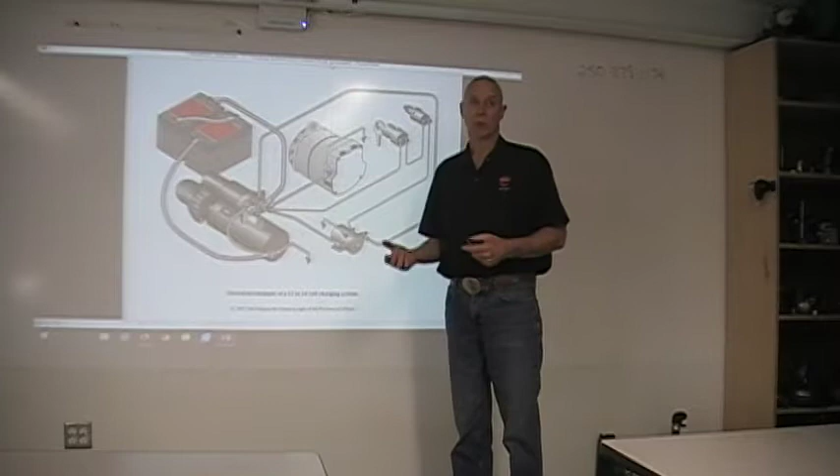So when we're doing voltage drops, we also have to do the voltage drop on the ground side. Now the rest of the circuit is our starting circuit, which we're going to be discussing at a later date.

Now again, one of the things we have to make sure of is that we're using the right battery for the application of the machine we're looking at. If the battery capacity is too small, that means the alternator is going to run continuously to keep charging that vehicle. Again, the first thing we want to check is the battery.

Is the battery working properly? And how we do that is we load test it.

Now, when we're taking a look at the alternator and how they're set up, the newer ones that use a serpentine belt also use a belt tensioner. And making sure that the belt tensioner is working properly.

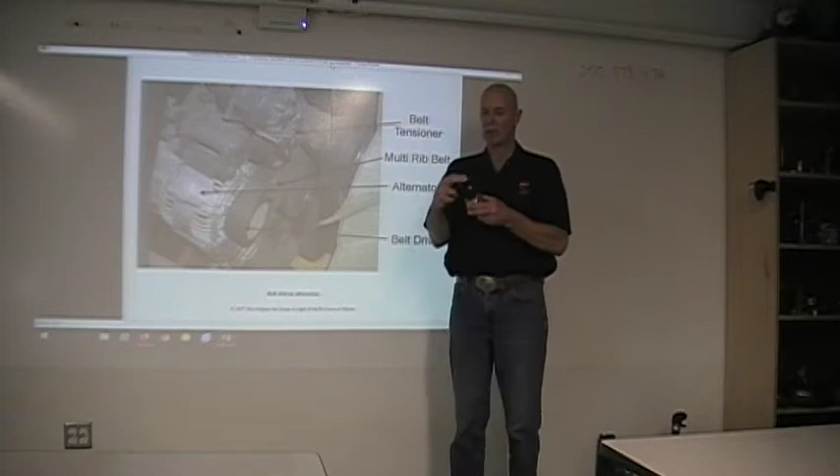So here we have a belt tensioner, and all it is, is a pulley that runs on a bearing. Now this has a spring inside that keeps a proper amount of tension on that belt at all times.

Some of the problems we run into is, oh, I can't get exactly the same length of belt. So if I get a belt that's too long or too short, we're going to end up with problems, because as an alternator starts to charge, it creates a magnetic field. That magnetic field will slow down an engine.

So if the belt is too long, the alternator could slip. If the belt is too short, it could put too much load on the front bearing of the alternator, and we could end up with a bearing failure.

So it's really important to make sure that when we are installing a new belt, the belt is exactly the right length for that application.

When we're taking a look at the components of an alternator, one of the things we have is regulators. They're internal regulators built inside the alternator.

Now this on a Leece-Neville, this internal voltage regulator, we can take it out. When we get into the Delco Remy, we can't. They are an integral part. We have to really take the whole alternator apart to get at the voltage regulator.

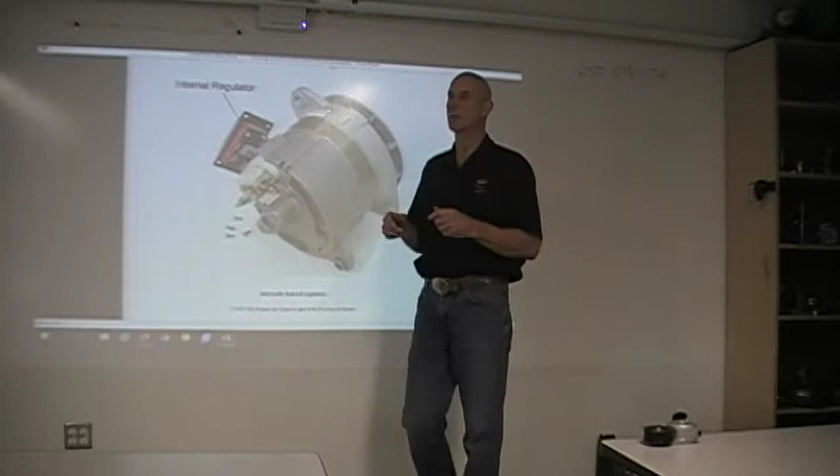On the older vehicles, they used to have an external voltage regulator that was mounted on the firewall. Now, before they came out with electronic voltage regulators, they used to use 3 separate coils inside this box to control the field.

Now when we look at alternators and how the circuits are set up, we're going to take a look at the alternator as 2 separate circuits and understanding how each of these circuits work to charge a battery.

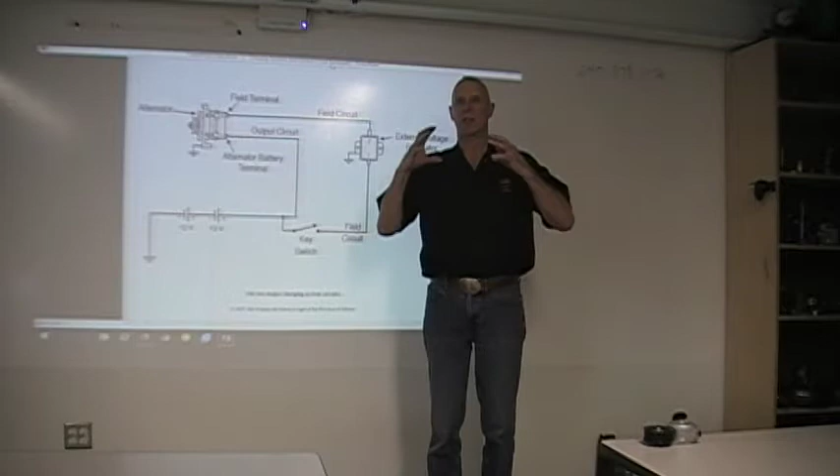So what we have here is, off of our battery we have our key switch. Once we close our key switch, it sends power to our external voltage regulator, and from there it goes to the F terminal on the alternator. The F terminal is the field terminal, and that is what's going to build the magnetic field internally inside the alternator.

Now if you remember back from when we were discussing basic electrical, if we take a wire or a conductor and move it through a magnetic field, we're going to induce voltage. Now when we move it back out the other way, it's going to induce voltage in the opposite direction. And this is called AC voltage.

And this is what happens when we have an alternator. It produces AC voltage. Now AC voltage for us doesn't do any good. We have to convert that AC voltage into DC voltage to be able to charge a battery. With AC, it pushes and then it'll pull. So we have what's called an AC sine wave when an alternator is producing current.

So again, what we have on an alternator compared to a generator: in an alternator we have our magnetic field in the center, and that is the rotor. Off of our battery, we go into 2 slip rings and 2 brushes. So as power is fed into the rotor, it builds a huge magnetic field.

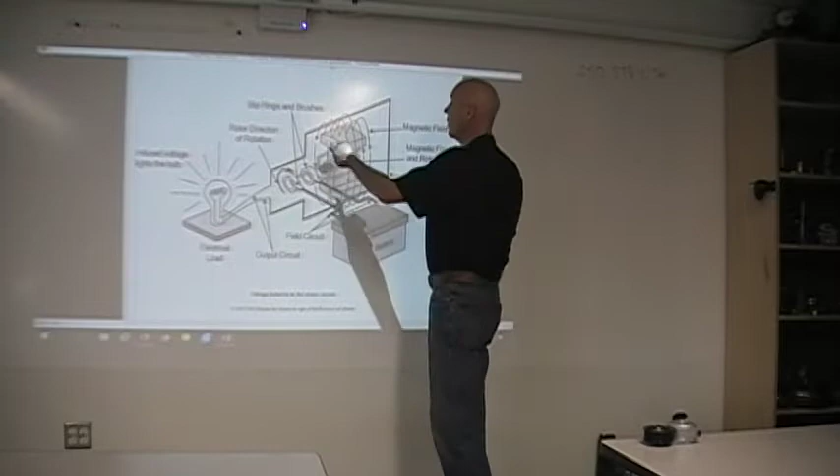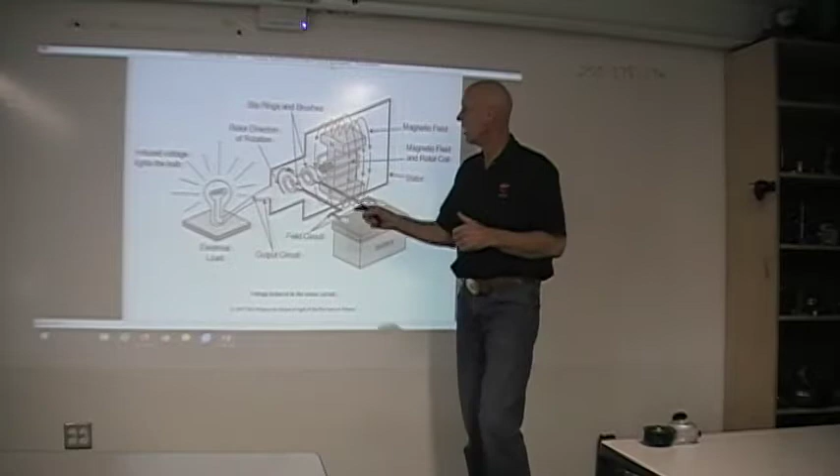Now this magnetic field, if you remember from basic electrical, has flux lines that run from the north to the south pole. As this rotor is spinning and those flux lines cross a conductor, it induces voltage within that conductor. Anytime it's in line with that conductor, it's inducing voltage as it's moving through there. Same with the south pole. So we have current flowing in one direction, it'll light up a light bulb.

Now as we go 90 degrees to that conductor, no voltage is induced and the light bulb will go out. But then when we get back down to the other side, voltage is going to be induced in the opposite direction.

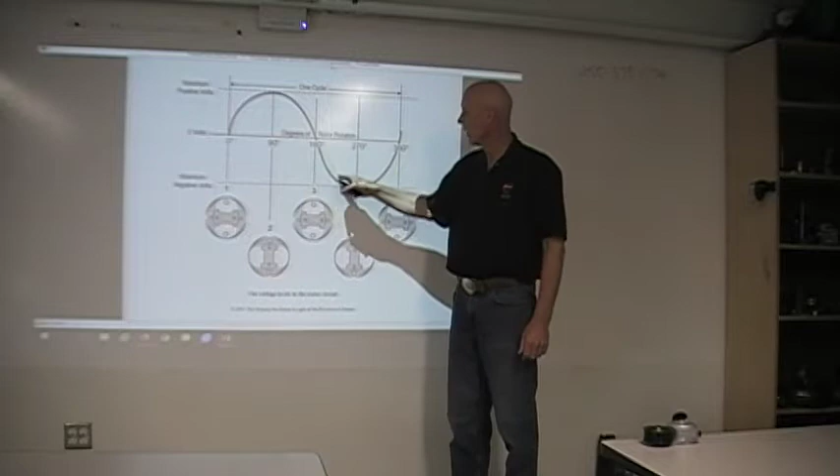We start at 0 degrees where it's not in line with the conductor. As it gets close to the conductor, it induces the maximum amount of voltage. As it comes out of alignment, we get back to 0 volts. When it starts to rotate in the other half, we have voltage in the opposite direction, and then it goes back up to 0 when it's not in line with the conductor.

Again, this is AC voltage, which doesn't do us any good. So what we want to be able to do is change that AC voltage into a DC voltage so that we can use it to charge our battery.

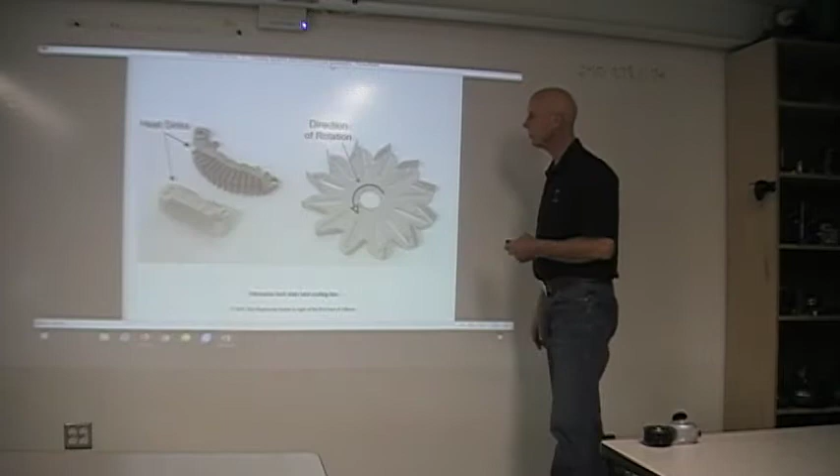Some of the things we see inside an alternator, and it's important to understand how these work: we have a heat sink. In the back of the alternator we have rectifier diodes, what's called a rectifier bridge. There's 3 negative and 3 positive diodes.

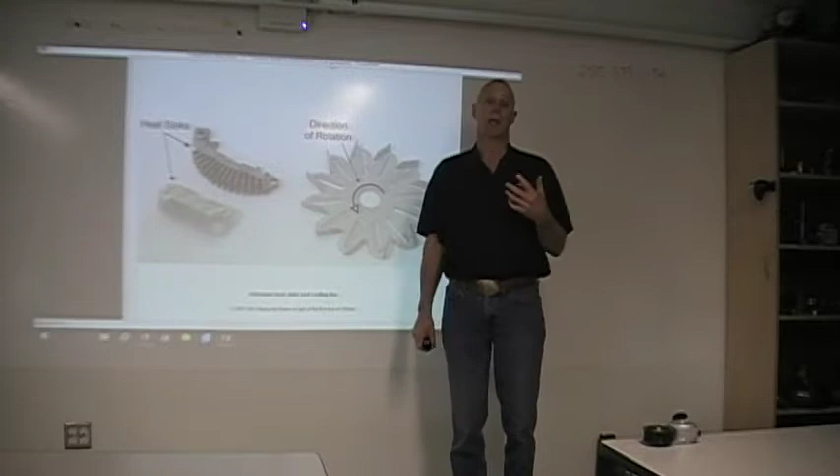Every time one of these diodes switches, it generates a little bit of heat, so we have to put these diodes into a heat sink to get rid of that heat or the diode's going to burn up. The other thing we have is a fan on the front of the alternator. The fan pulls air through the back and out the front, because we want the coolest air to cool those diodes. That's what we're after, taking that heat away so they don't burn up.

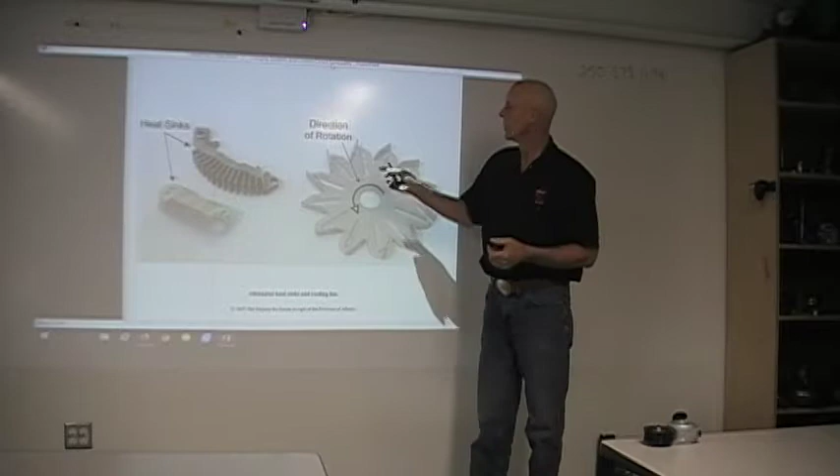Now this fan is a directional fan. You can get different types of fans, and it does matter which rotation it is, but if we put the wrong fan in, we'll be bringing air from the front through to the back.

One of the common failures is a truck that's leaking a little bit of oil. That oil collects with dirt and plugs up the back of the alternator. If we don't have airflow through the back to cool those heat sinks, we're going to overheat the diodes and have an alternator failure. So it's one of the visual checks we can do as we're looking for problems.

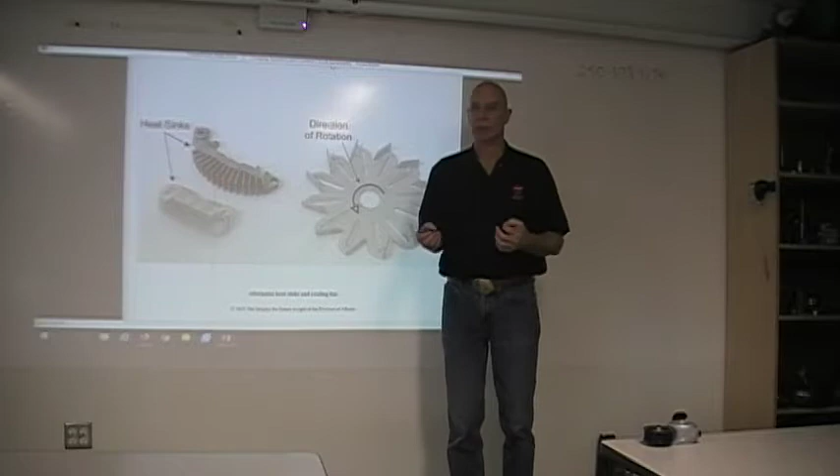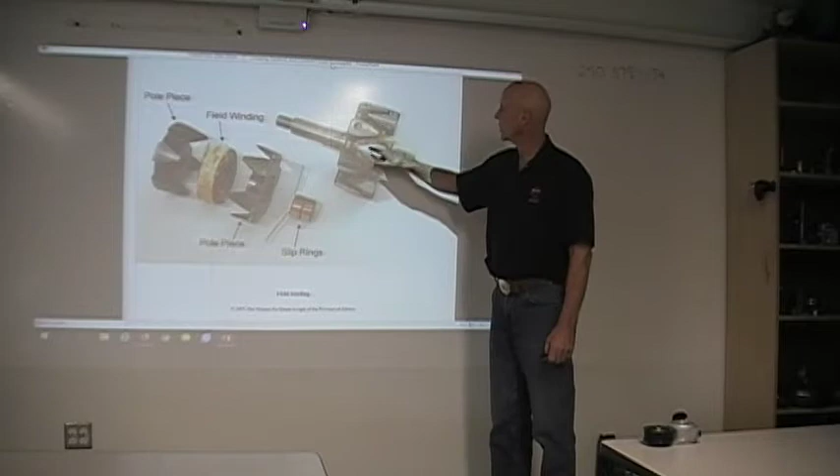Now the other thing we have inside is the rotor, this is the component that builds the huge magnetic field we need for inducing voltage into the stator. All it is, is a coil of wire with 2 pole pieces. So we'll have a north, a south, a north, a south, all the way around. Also on there we have our 2 slip rings, because we have to be able to feed power or current through that rotor to induce that magnetic field. Otherwise, if no magnetic field, no charging.

So when they're all put together, this is what we have if we take a look at the rotor.

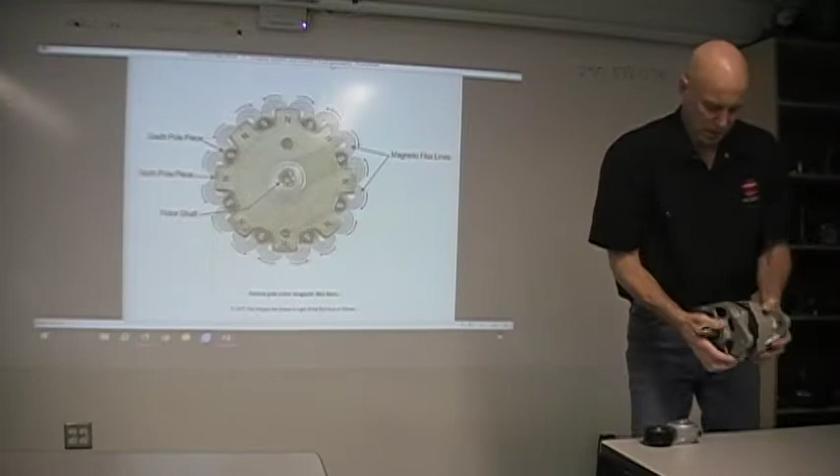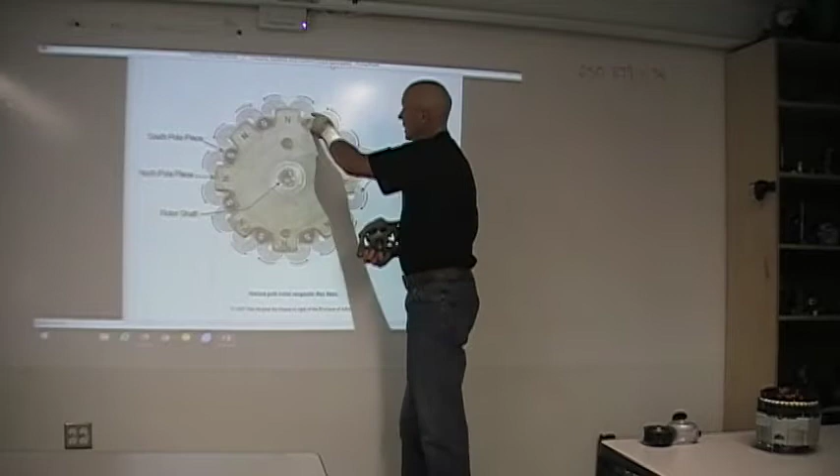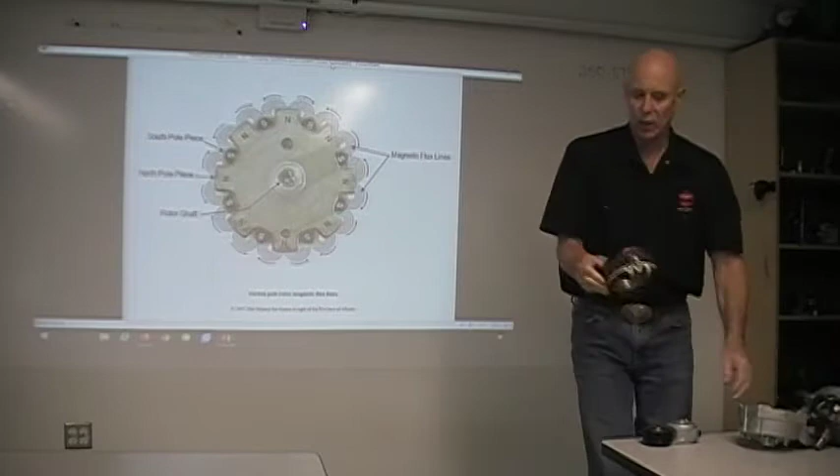So this is our setup. This is what our rotor looks like. We'll have a north pole, south pole, north pole, south pole. As this rotor is spinning, we have flux lines that come off that go from north to south. As these flux lines cross a conductor, it'll induce voltage in that conductor. So if we have our stator with all these windings, as these flux lines cross a conductor in the center here, it's going to induce voltage in that conductor and send it out through these three leads.

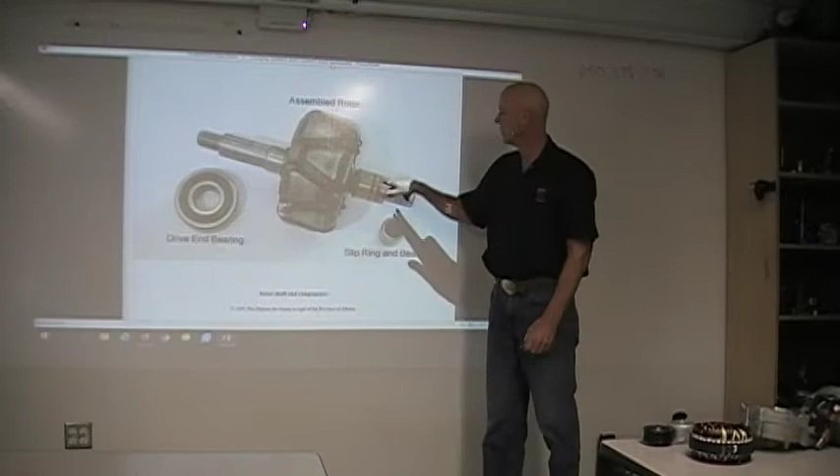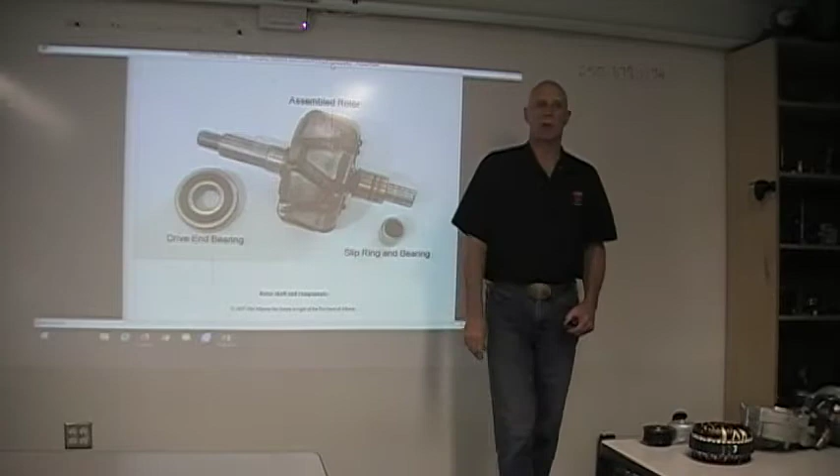Again, we have our slip rings, and our two brushes are going to fit on the slip rings. We have a back bearing and a front bearing. The front bearing is bigger and carries the most amount of load. It's really important that if we're adjusting belts, if we have V-belts, we don't adjust them too tight, or we're going to put extra load on that bearing.

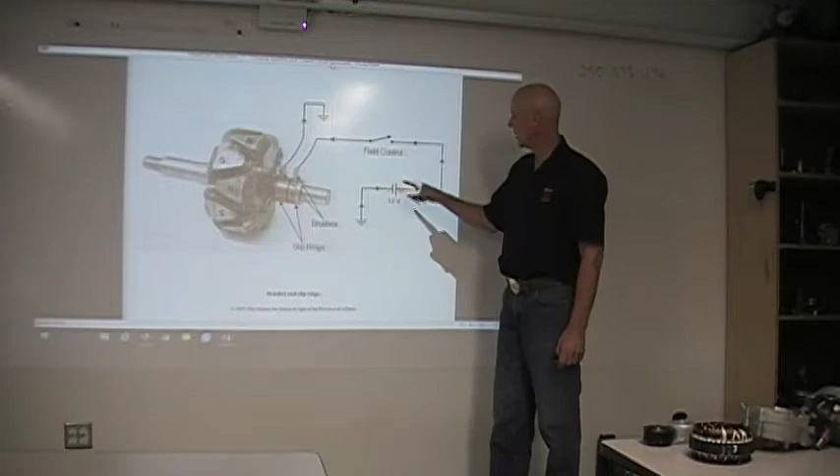So this is how our field circuit's set up. Off of our ground from our battery, it goes through our field circuit. If our field circuit is open, no current can flow through the rotor and it can't produce a magnetic field, and again, it's not going to charge. As soon as we close the contact here, current is going to go through our slip rings, through our rotor, out the other slip ring, and back to ground to complete our circuit, and we're going to build a magnetic field. Now, we have to be able to control how big our magnetic field is going to be, and we'll do that with a voltage regulator, which we'll discuss a little bit later.

Now, these are two different types of alternators. This is probably the one we see most common. It runs on a V-belt, or it could be a serpentine belt. The other type of coupling is a direct drive, which could be bolted directly to the engine, so there will be no slippage in this one at all.

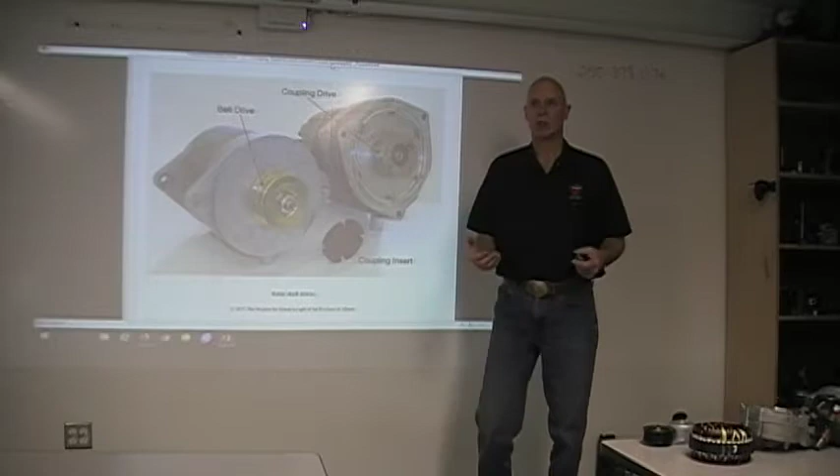Now we take a look at our stator. This is a three-phase stator, which means we have three separate sets of windings. They're laminated and have a resin coating on them so they don't contact each other, otherwise we'll end up with a short. Remember, the three faults we have in the circuit are opens, grounds, and shorts. If this gets too hot, the coating or varnish is going to bake off and start to fall apart, and then we'll have wire-to-wire contact, and we'll end up with a problem with our alternator.

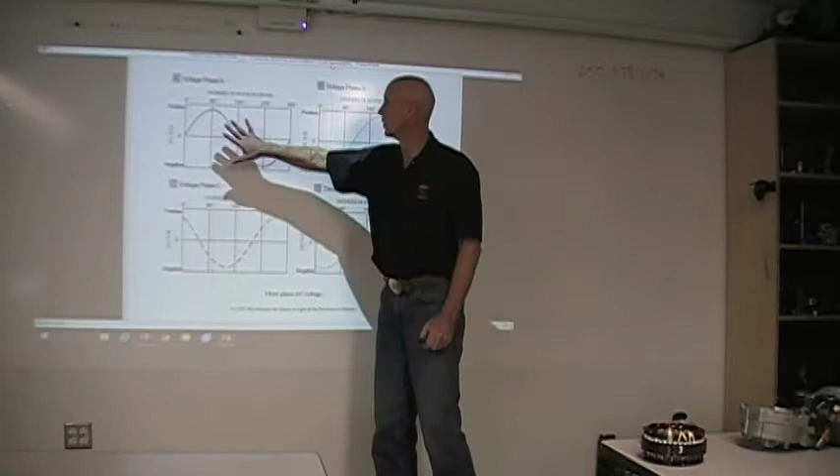Now when we take a look at the phases, if we take a look at what we were looking at earlier with a single wire, that's single phase, but we have three phases. A single phase would look like this. When we get into three-phase, we have three separate phases that induce voltage, or current, into that stator winding. If they could color code them, we need as many wires as possible. The more wires we have in each of the phases, the more voltage that is induced in that winding as the rotor spins and those flux lines cross that wire or conductor. It's going to induce more voltage.

So there are two different types of windings we're going to see. We'll see a Y-type stator, and we have to take this apart to identify it. We'll see three separate ring terminals with a single wire on each, and then another set where all three wires are wrapped together, and that's the center point. There are certain applications where we might want a Y-type alternator, or a delta style. If you take a look at this one, we have three ring terminals, but two wires on each. This is a delta style. If you separate them, you can see the two wires on each.

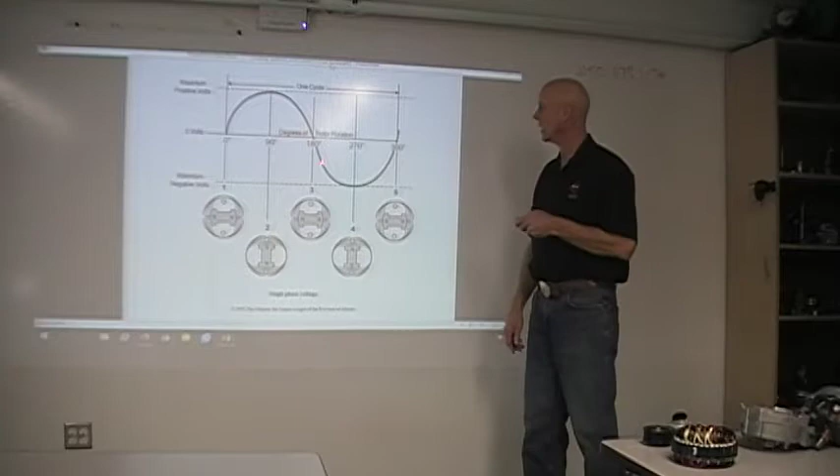So when we go into a single cycle, this is going to turn twice. What happens is we end up with this AC sine wave, and this AC sine wave doesn't do us any good for charging a battery.

Now how we can fix that. So in a single phase, if I put a diode in, forward biasing means that I can have current flowing through a diode. We've already discussed how a diode works.

As the North Pole passes by a stator winding, it's going to induce voltage. That voltage is able to get through the diode, out through my load. Let's say my load is my battery. It can go out to the battery from the negative side, and back to that stator winding. We need a complete circuit in order for current to flow.

Now what happens when the South Pole gets close to the stator winding? As it induces voltage, no current can flow because it can't get past that diode. So this is what's called half-wave rectification. We're able to use this one wave, the upper half, but the lower half is no good to us.

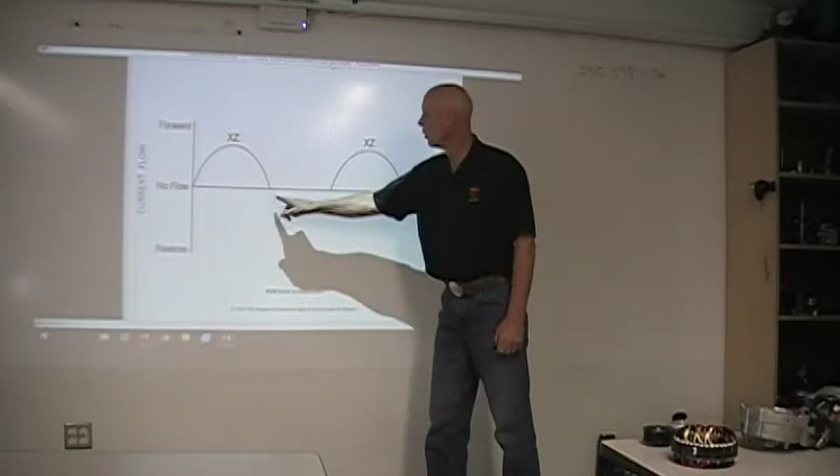So we want to be able to use this other half. This is what the sine wave would look like. The lower half that is supposed to be here is gone because the diode prevents current flow.

So how do we fix it? Well, if we just have a single phase again, by putting 4 diodes in, we can now rectify that bottom half, control it, and use it to charge.

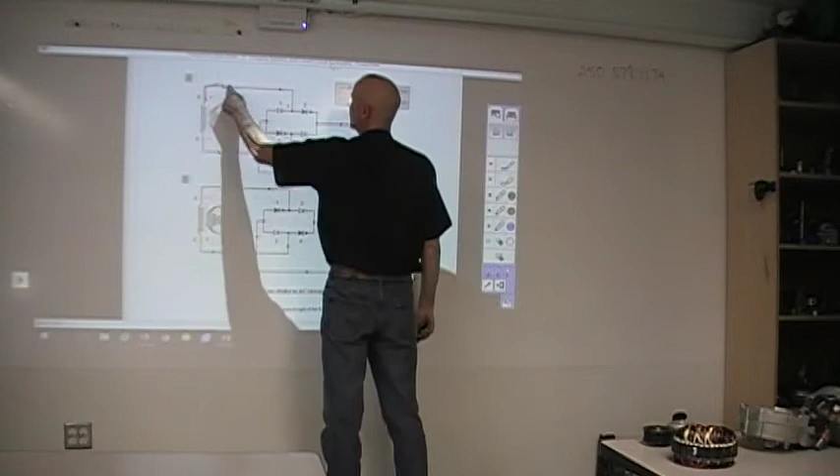As power flows out, it can go through here. It can't get through here because it's blocked by this diode, so it goes out here. It can't go in here because it's blocked, so it has to go out to my load. Again, we have to have a complete circuit, so from the battery it goes back in, goes in here. Now it can't get out this one because the voltage here is pushing that diode, so it won't go. So it has to go this way to complete my circuit.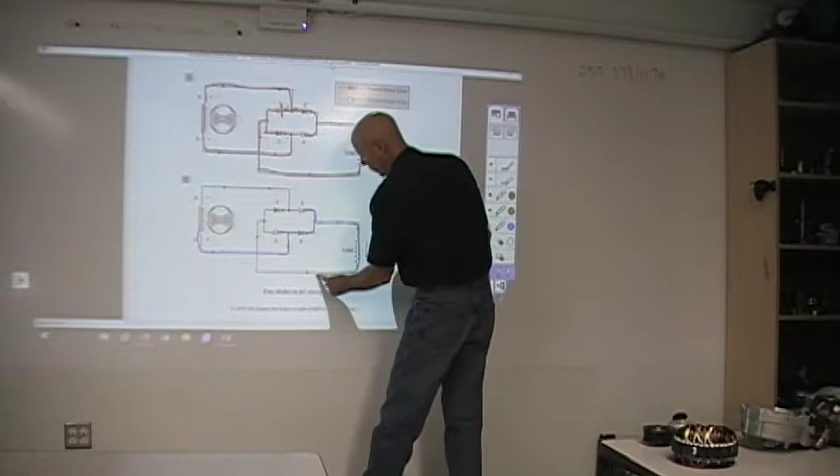Now if we take a look at the other half, current flows and builds up this way. Again, it can't get out there, so it's got to go out here. Can't get out there, it's got to go out through my load, back in, through to complete my circuit. So this will give me full wave rectification by using 4 diodes in the system.

Now this is a single phase. What we see is 3 phase, so we're going to have to use more diodes to control this.

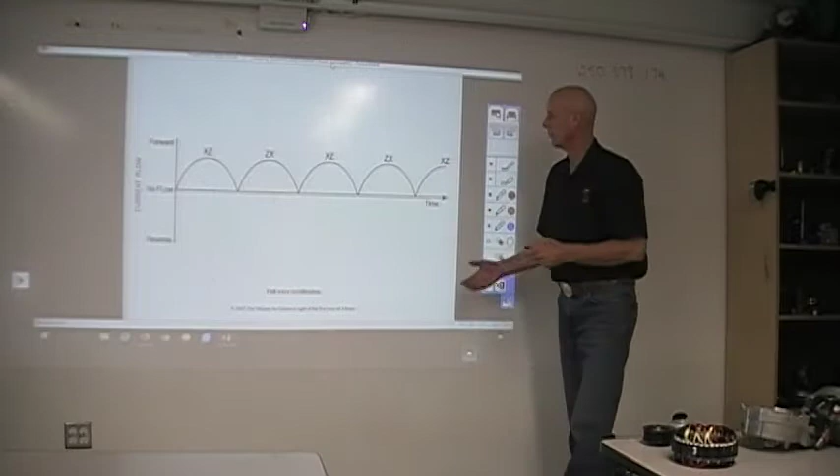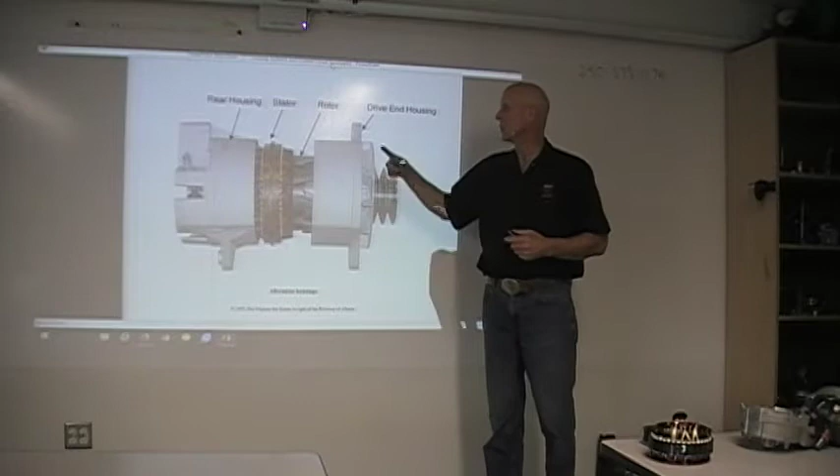So how does this all work together? Well, inside our alternator, inside our case, our rotor is going to spin. Our stator is stationary, it just sits there, it doesn't move. But as this rotor spins and our North Pole and our South Pole pass one of the conductors in here, it's going to induce that voltage.

The other thing we have to pay attention to if we're rebuilding alternators is these insulated screws. Again, if we take a look at our rectifier bridge, our negative heat sink is grounded, but our positive heat sink is insulated. And if I don't put one of these insulating screws on my positive, what's going to happen is it's going to short out the positive side and it's going to blow the diode, and then we're not going to get charging on it.

Also on the back, we want to have insulating washers. If you take a look at the back side of this, this is our positive stud, this is our R terminal, and this is our I terminal. Now we want those insulated. The other thing you'll notice on the back is we also have a stud we can use for a ground. Again, if we don't have a complete circuit, that alternator is not going to charge. So it could be as simple as putting a new ground strap on an alternator to get it to charge.

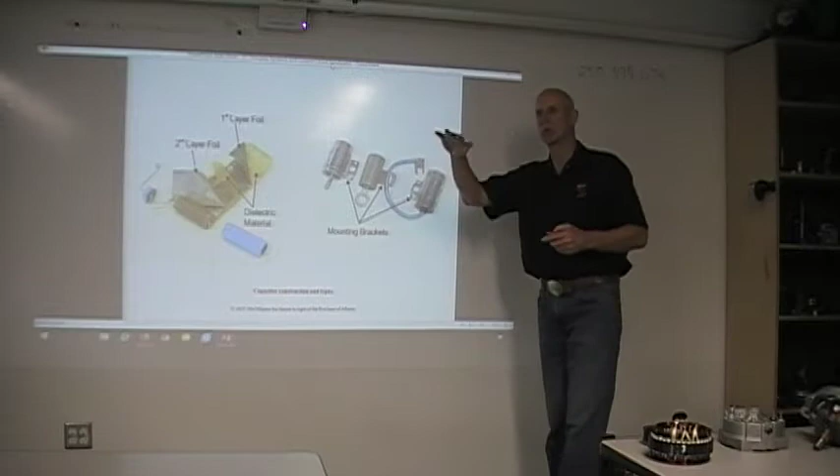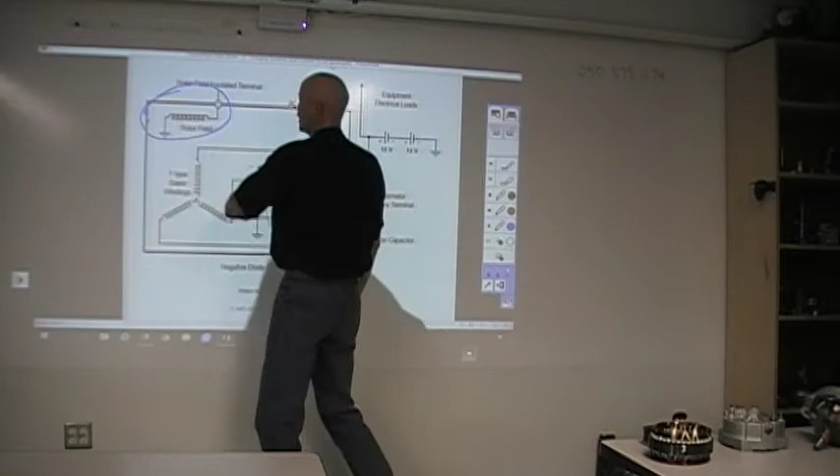So if we take a look at how this alternator works, we have our 3 negative diodes and our 3 positive diodes. We have our 3-phase power in a Y-type stator. So what these 3 diodes do is control all 3 phases so that we can charge a vehicle. Now, if we look up here, this is our rotor field. Again, like I said earlier, we're going to separate this into 2 separate components - one will be our rotor, and the other will be our stator and our diodes.

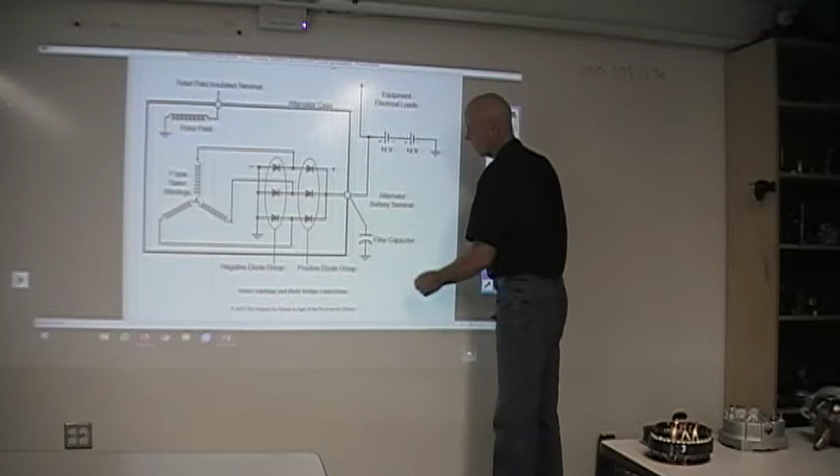So how does it work? Well, as the rotor's inducing voltage in one of the stator windings, it can go out any one of those 3 diodes depending on which ones are being induced. So it can go that way, it can go that way, or it can go this way or this way. There's a lot of different ways it can go, but it can only get out one set of diodes at any time. So what's happening here is we're getting full wave rectification in 3 phases.

And this is what we need to be able to charge our battery. So out of our stator, we're getting AC current. But once they get past these diodes, we've now converted that AC into DC. Now that voltage can go out and charge our battery.

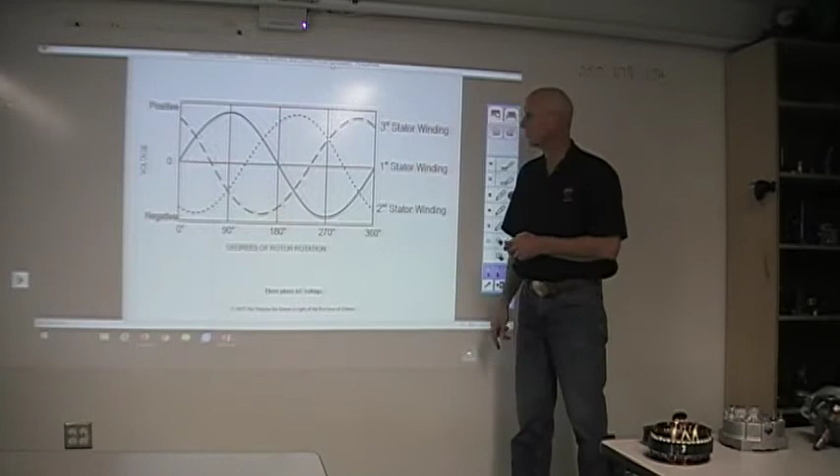And this is, if we put this on an oscilloscope, this is what we would see.

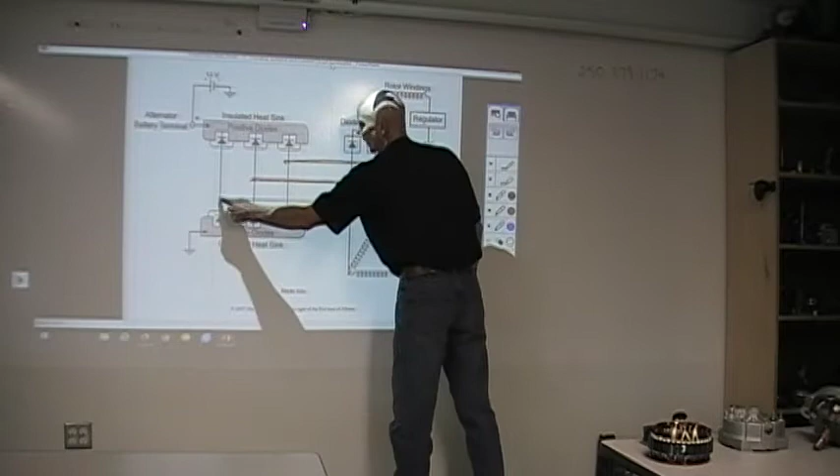Okay, so this is a picture of our negative or positive diodes, but we also have another thing in some alternators called a diode trio. The diode trio has one purpose in life, and that's it - it's to convert AC. So you can see we have a tap that runs from our stator. Each one of these is hooked to the rectifier bridge. So our diode trio takes AC power, and through these 3 diodes - again these 3 diodes are insulated from ground, they're positive diodes - we convert AC into DC power, but its one purpose in life is to feed the rotor. That's it, it doesn't do anything else.

So, again, depending on where our voltage regulator is in our system, it's going to control how big that field circuit is. So when I first start a vehicle up, say I've had my lights on, this voltage regulator is going to sense the battery voltage is low, and it's going to basically put that rotor into what's called a full field.

So the magnetic field is going to be massive. The bigger the magnetic field as the rotor's turning, the more current it's going to produce. Now, as that vehicle runs for a couple of minutes, it starts to charge the battery up. The battery's going to give pushback to the voltage regulator, which senses that the battery's coming up to charge. It's going to shrink that field till it's smaller and smaller, and once it's up to full charge, then it will be next to no field.

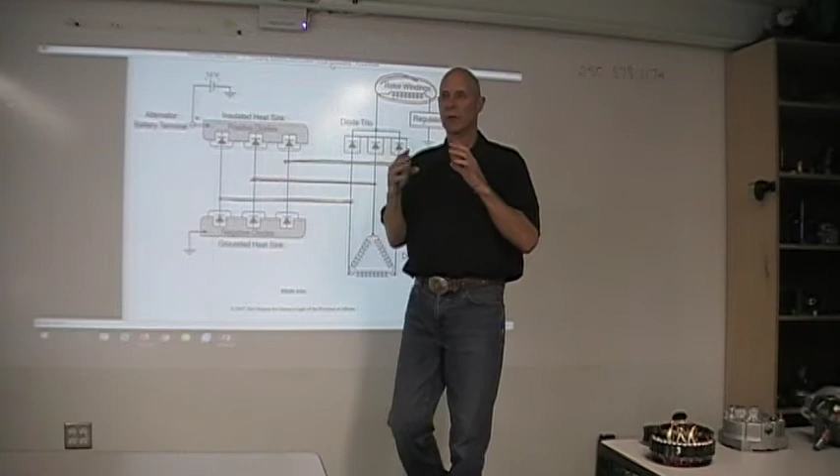Now, if we turn any components on, we're going to create a demand on the circuit, and the field would start to get bigger. We're going to take a look at the voltage regulator and how it does that a little bit later.

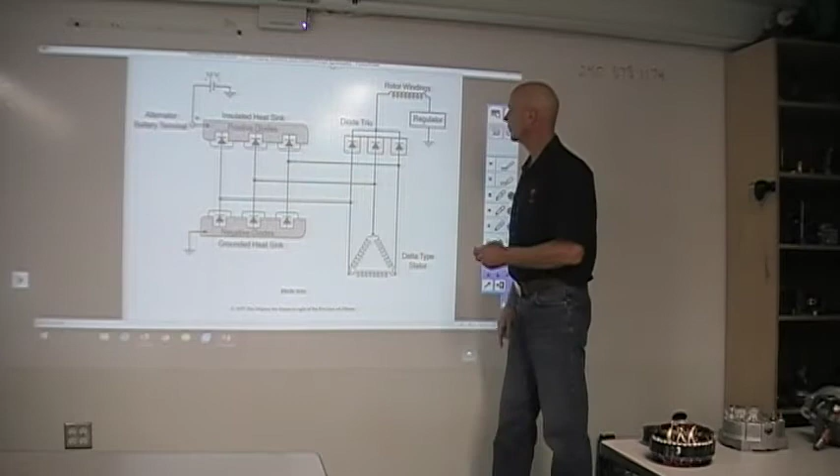Now, how do we know what type of alternator we're dealing with? Is it negative ground, is it positive ground, is it 12 volt, or is it 24 volt? Well, on the alternator, there's either a tag or it's stamped. On this alternator here, this one is 12 volt, N for negative ground, and it's a 150 amp alternator.

This is where, when we're going to test an alternator, we need to know what the amperage output is. When we're changing an alternator, we need to know whether it's a 12 or 24 volt, whether it's a negative ground or a positive ground. Because if I put a positive ground alternator on a negative ground system, my diodes are backwards, and it's going to go poof - it's not going to work. So making sure that we install it properly.

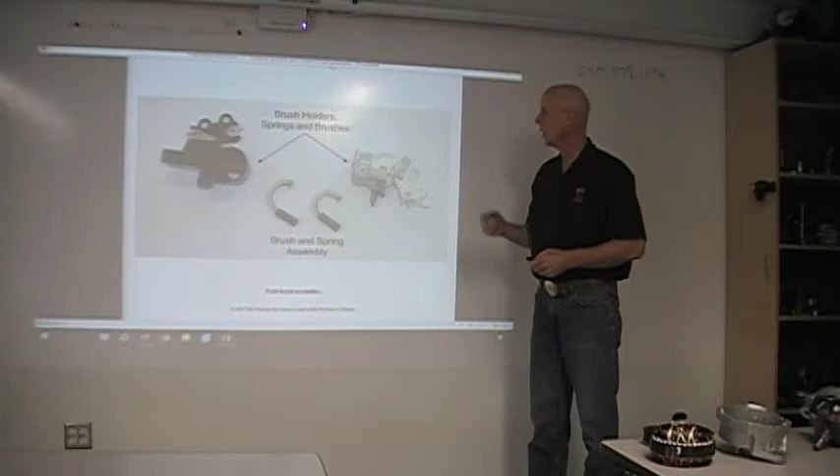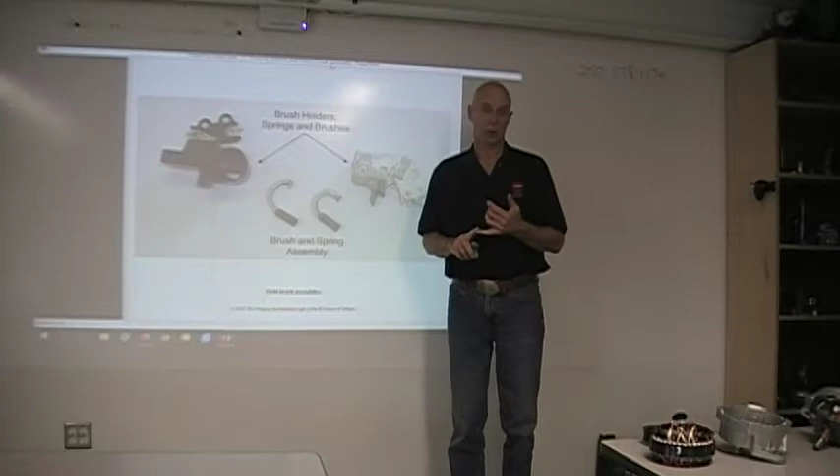When we take a look at the brush and spring assembly, okay, so this is where the rotor gets fed. So from our power, it goes in through one of the brushes, through our rotor winding, out the other brush, and again it could go to the voltage regulator, or it could go to ground depending on the style we have. When these brushes are 50%, they're considered to be worn out and should be replaced.

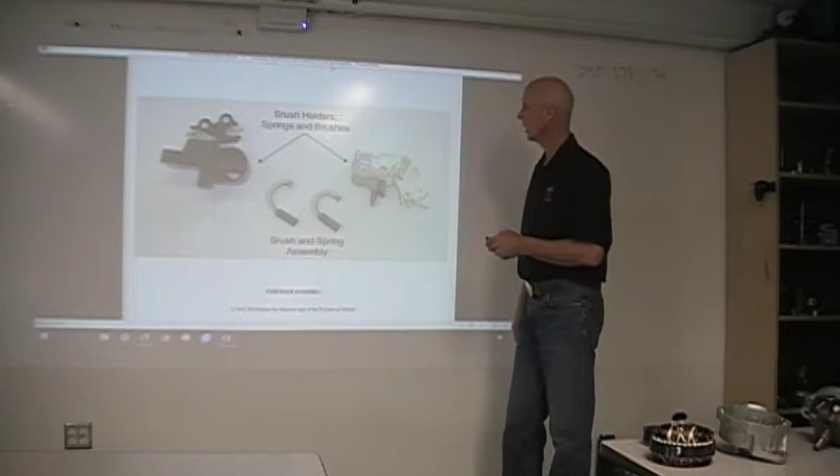Now the other thing we see is a brushless alternator, so they don't use brushes. What they have is this setup, and really all that is the rotor. It's stationary, and we have two wires that feed this. Again, it works the same way, but what we have is this hollow rotor, and it spins around. Now this is building up my magnetic field, so it does exactly the same. We'll have a north pole, a south pole, north pole, south pole, all the way around, so we can still build a magnetic field that's rotating, that's going to cross those conductors to induce voltage.

So this is, when I said we break it up into two separate circuits, this is one of the circuits. This circuit contains our field windings, our slip rings, our brushes, and our voltage regulator.

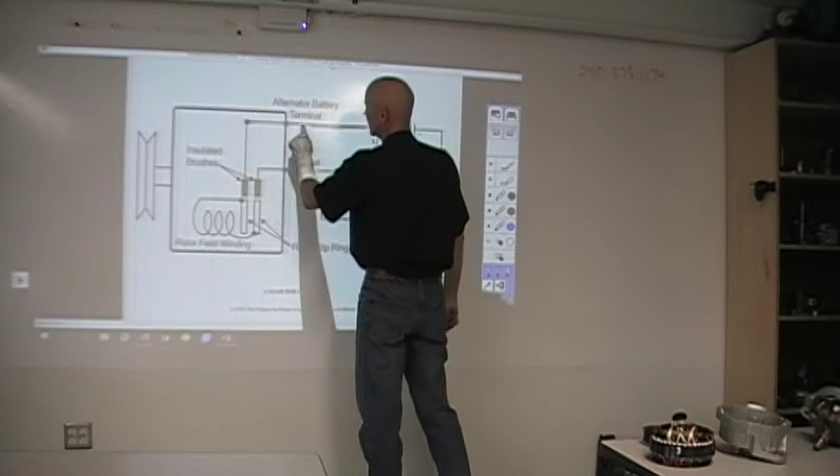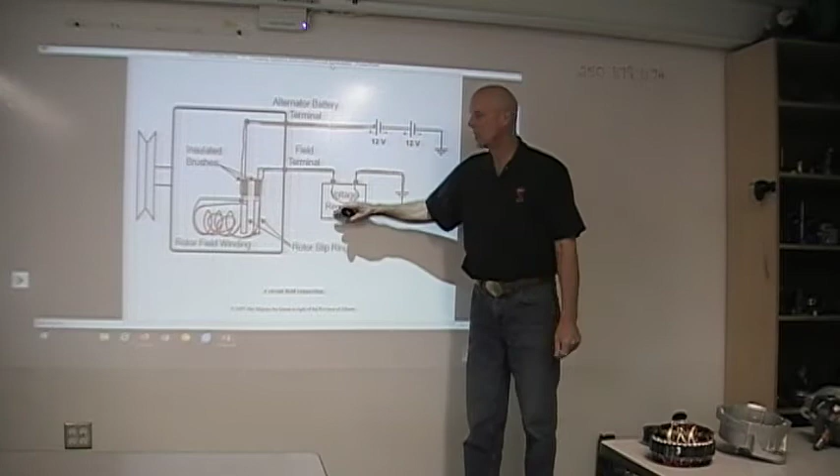Now there's two different styles that we're going to take a look at. This is an A style voltage regulator, which means that power comes in from my battery, in through my rotor windings, out the brush, through the voltage regulator to ground. So in an A style, the voltage regulator is after the rotor windings, and it controls the ground side of the circuit.

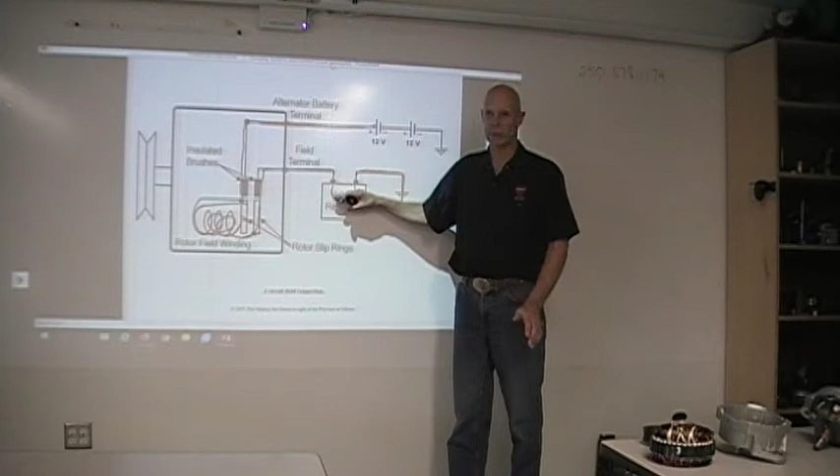The second one is a B style, and B is before the rotor winding and is controlling the power side. So when we close the key switch, voltage will go through here, through my rotor windings and out to ground to complete the circuit. So always remember, A is after, so it controls the ground side. B is before, and it controls the power side.

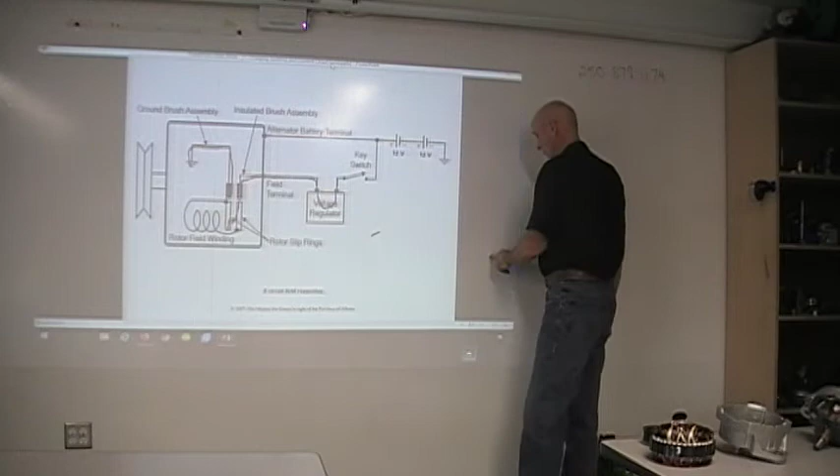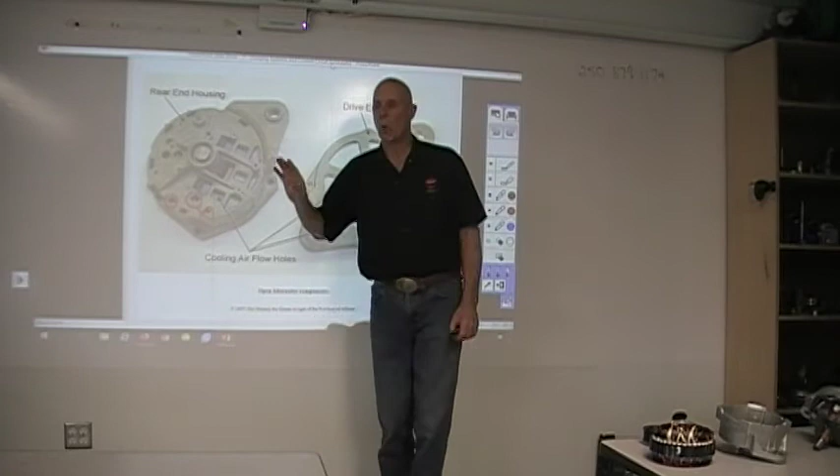So if we take a look at our rear housing, this is a bare housing, doesn't have anything on it. These are our insulated connectors here. And back in here, where these openings are, is where my rectifier bridge and my heat sinks are going to be cooled.

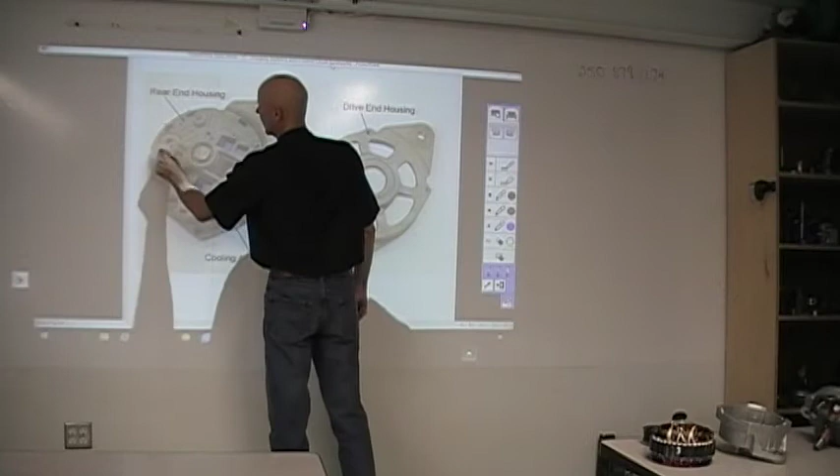The other thing on the back of an alternator you'll notice is the little shape of a D, and most alternators will have it. On here, it's right here. Now, what that D is for, if you take a look internally - and I don't think you can see it here - I'll get a picture of it later.

But inside here, there's a little steel tab. And what that's doing is, if you stick a screwdriver in there and go up, there's a little tab you'll touch. What that will do is that will full field the alternator. It will tell the alternator, basically - if you go back to a circuit, let's just take a look at it.

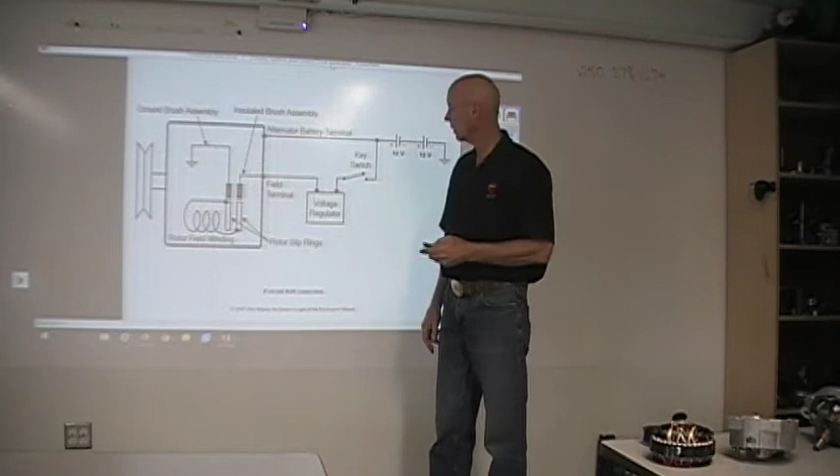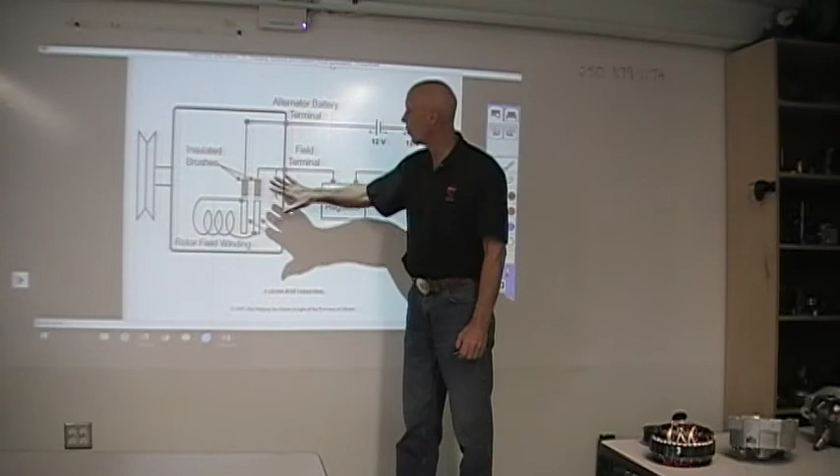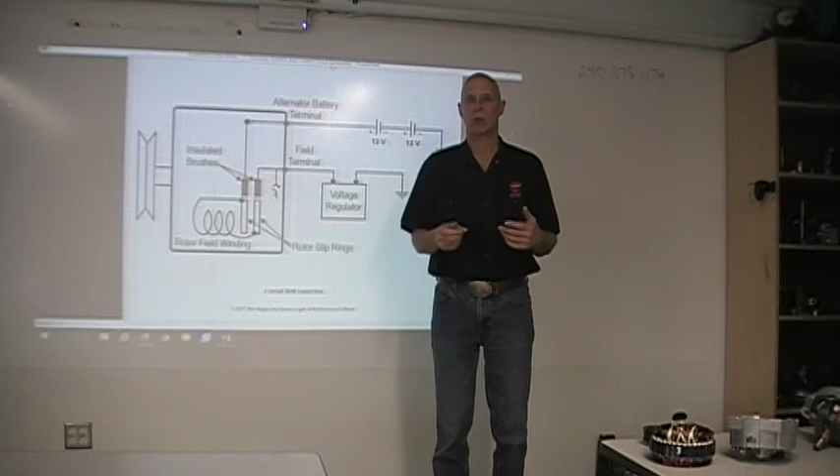If we go back to this circuit here, when I put the screwdriver up, what it's doing is attaching that directly to ground. When we do that, we take the voltage regulator out of the circuit, so now we're getting full power to the field. The field's going to be as big as it can possibly get, so we'll get a large amount of output. Be very careful not to do that for a long period of time, because it can exceed the battery's capacity and fry some electronics. So be very careful when you're full fielding for any reason.

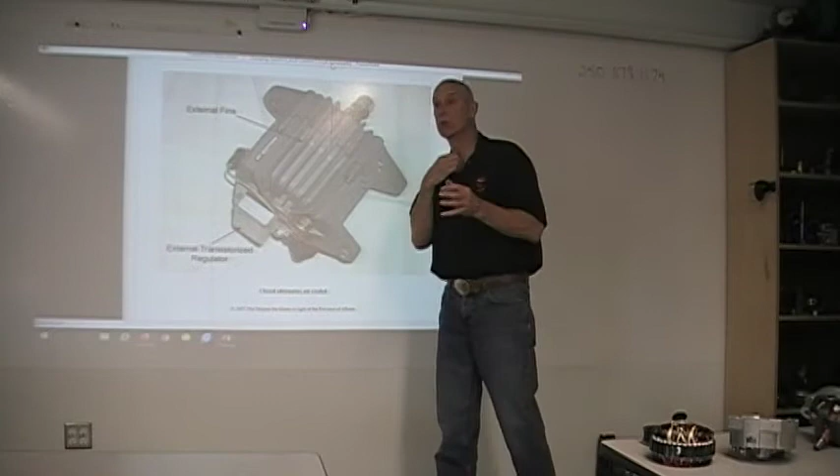Depending on the application, an alternator can't survive in dusty conditions, so it may be air-cooled. It's completely sealed, and air flowing over top of the alternator keeps it cool. There are also some that are oil-cooled, hooked up to the oil system, and oil flushes through the alternator to keep it cool. That oil just drains back into the sump.

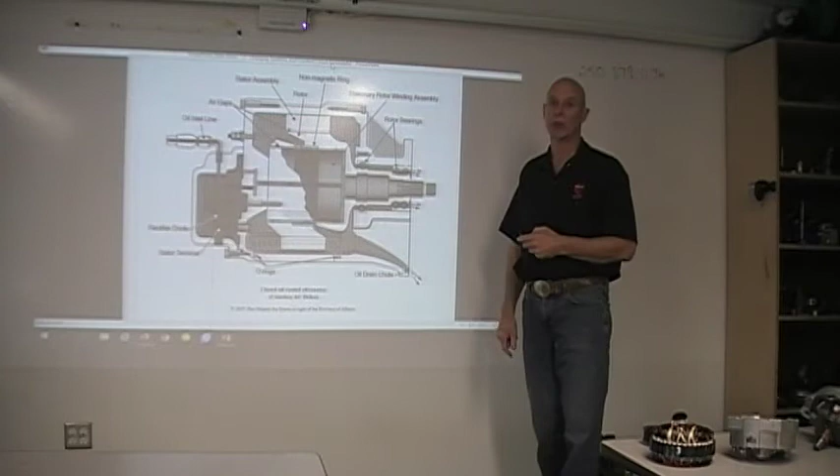When we take a look at voltage regulators, this is a Leece-Neville and this is a Delco Remy. This is what's controlling it. These are electronics, and one of the things electronics do is make a square wave. If we remember what a square wave looks like, we have on time and off time.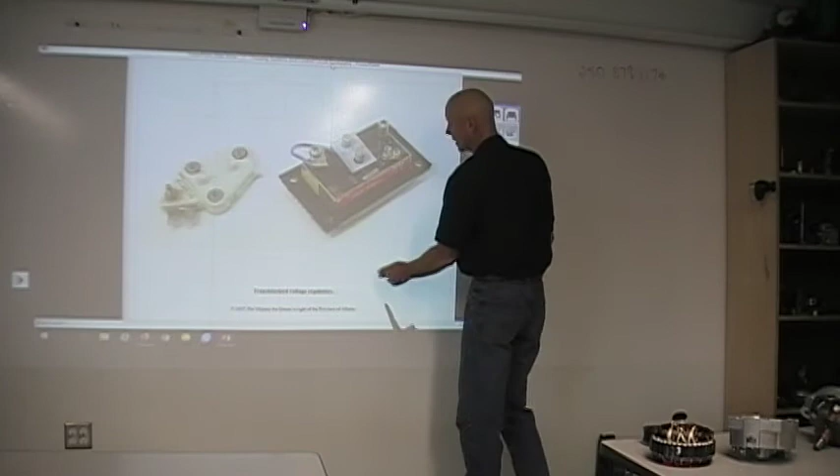If the alternator senses that the battery is close to being dead, we're going to have a large amount of on time and a very small amount of off time. But once the battery comes up to capacity, we'll see the opposite - a very small on time and a very long off time, so the magnetic field is smaller and we're not producing the amount of current that we need.

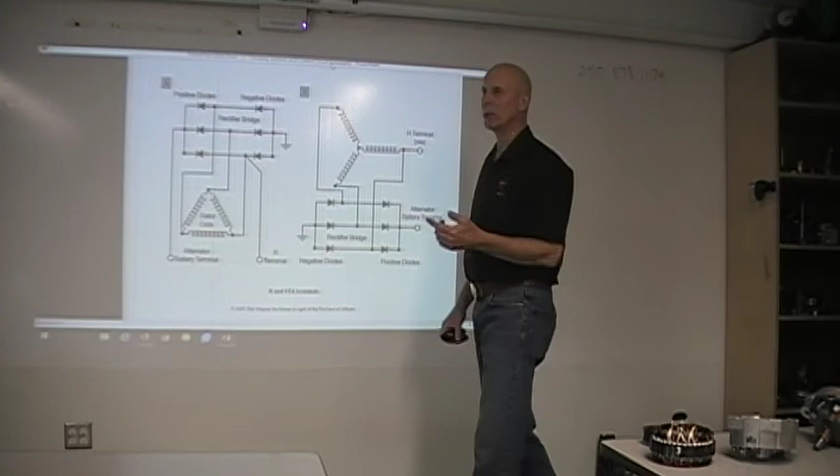On the back of the alternator, there's also an R terminal, and it's set up to go into one of the stators. I've had this happen once where one of the guys put an alternator on a vehicle and it wouldn't charge. He came to me and said he just put a brand new alternator on and it won't charge. So what you have to do is flash the alternator - take a jumper wire and touch these two together just briefly, and that'll show the alternator the way current is supposed to flow.

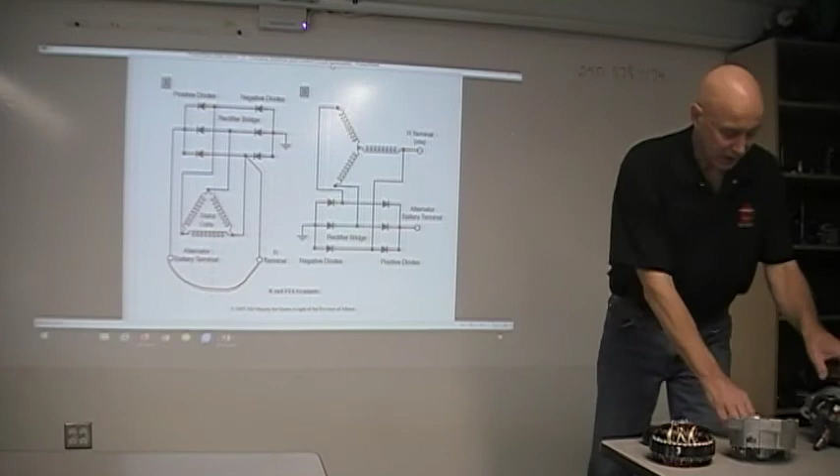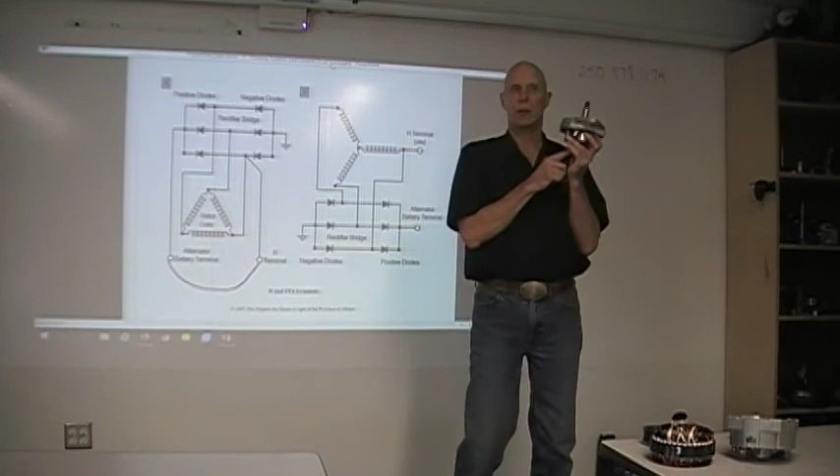The other thing we have to be aware of, and I've seen this happen, is when we're changing the pulley on these, the new ones don't have a key cut in them, so the pulley can actually slide on. Now the end of this is set up to use an Allen wrench and a wrench. Most people just put their impact on there, but I've seen an impact, just from the vibration, break the brushes on the slip rings, and now your alternator is no good. So be very careful when you're changing pulleys - make sure you don't use something that's going to break the brushes.

So this is simple and easy - again, you just take it from the power wire, flash it to the R terminal, and it'll set up the power flow.

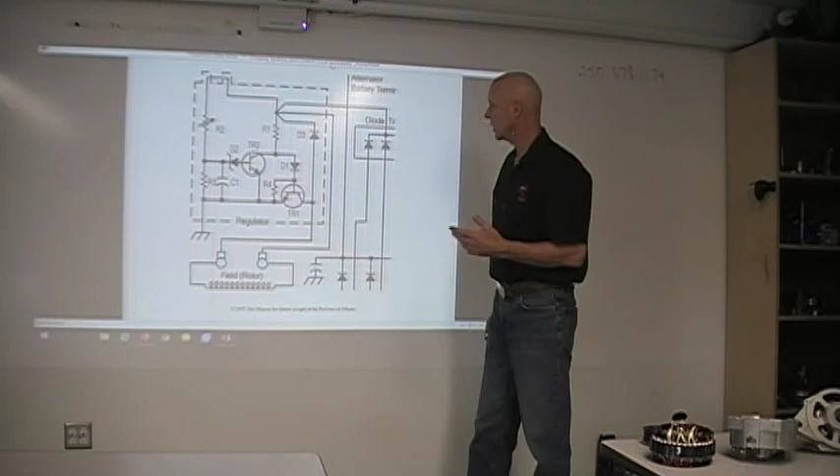Now this is a picture of a voltage regulator. We talked a little bit about diodes, so we have a diode here - this is our diode trio. Our diode trio's purpose in life is to change AC to DC for the voltage regulator, and that's it. So this is our number 1, 2 terminal. If you take a look at the back of the alternator again, this is our 1, 2 terminal up on top.

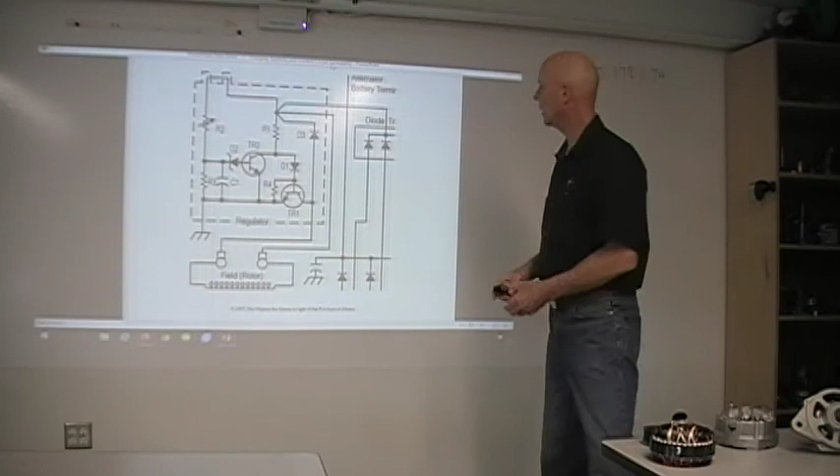So what happens here is this is controlling how big my field circuit's going to be. Now, some of the things we didn't talk about - we've talked about resistors, but we didn't talk about transistors and what a transistor does.

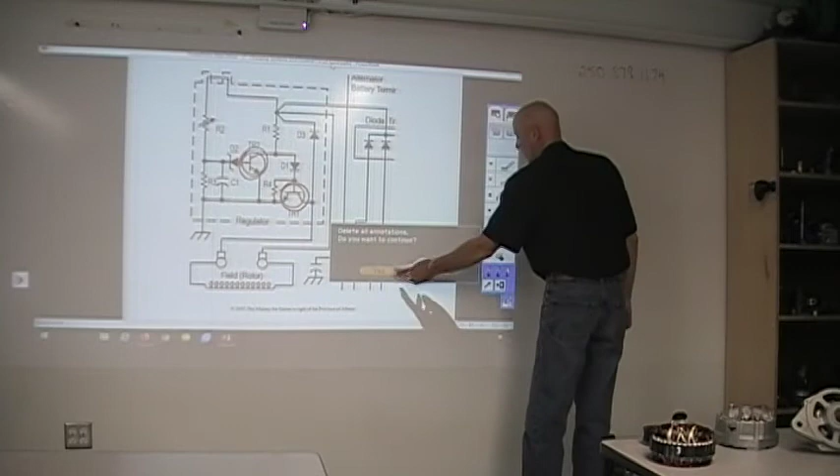Well, a transistor is really 2 diodes and how they're set up, so there's NPN and PNP. How an NPN is set up is, if we take a look at a very simple diode, we have an N and a P, negative and positive. Well, a transistor can have another P here. Now, how this works is if we have a PNP transistor, it needs a ground circuit to activate it. But if we have an NPN, it needs voltage to trip it, to tell it to open up.

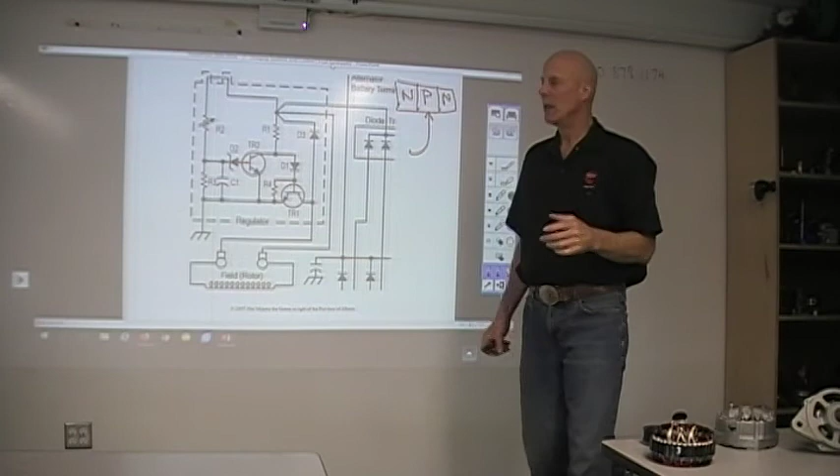And all a transistor is, is a very, very small relay. So it's how we control it. I can control the power side of a relay, or I can control the ground side of a relay however I want, and that's all this is doing in the circuit.

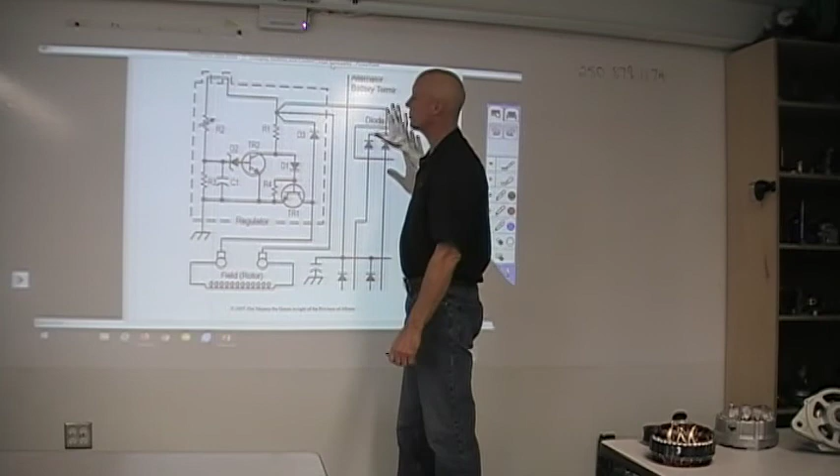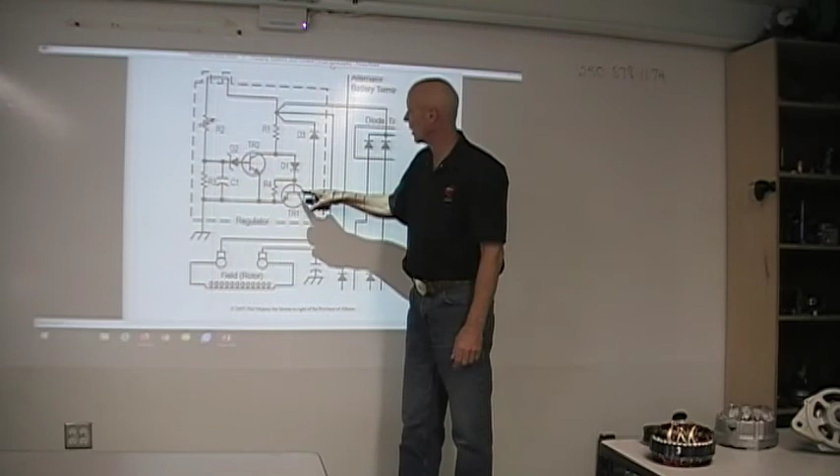So what happens here is voltage that's produced from our diode trio comes in through here. It can't get out through that diode, so it can't go anywhere. But what happens is now voltage can come around here, go through here, up through here, back here, but again we already got 12 volts of push there, so nothing's going to happen. So it has to go through here, but in order for this to be tripped open, power has to come through here.

I'm not going to ask you to explain how a voltage regulator works. Just understand that it is a square wave. So this is how voltage goes through here, okay? So once this is tripped and triggered closed, it can get through ground and we're going to have a complete circuit and it's going to charge.

Now we also have another thing that we haven't talked about. It's called a Zener diode. It's like a normal diode, but it has a breakdown voltage that will allow reverse biasing once voltage reaches a certain point. Now, for a 12 volt alternator, that breakdown voltage is roughly 14.2 to 14.5 volts. So once the battery pushback gets to that point, that Zener diode is going to open and it's going to shut this circuit off so it can't charge anymore.

Now, we also talked about how do we know if an alternator is charging? Well, there's 3 different ways.

We can have an amp meter, and an amp meter is hooked in series within the circuit, so it can tell me whether current is being fed to the battery or being taken away from the battery. What you'll see on an amp meter is it will have a little dial and it'll be 0. Let's just go 10, 20, 30, and let's say this is minus, and then this would be plus 10, plus 20, plus 30. So if we have the key turned off and we have all our lights on, this is going to point in that direction. But once we start the vehicle and it starts to charge, it's then going to point in this direction at however many amps that alternator is producing.

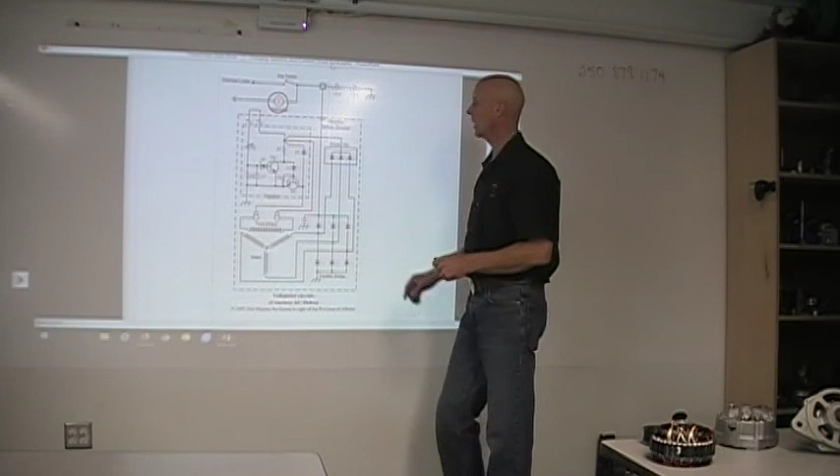The second one is a voltmeter, and these are on a dash. Now, a voltmeter is set up in parallel, and it has to have its own ground.

And the third style is just an indicator light on the dash. So when I turn my key on, the indicator lamp will light up because it's getting its ground through the circuit. What happens when I start it is as this starts to charge, I get power being fed up here, and if I got power on both sides of a light, the bulb goes out. Now, if this resistor fails, what can happen is as you rev it up, the light will get brighter, and as you let off on the throttle, the light will get dimmer. You know that something's wrong with that indicator.

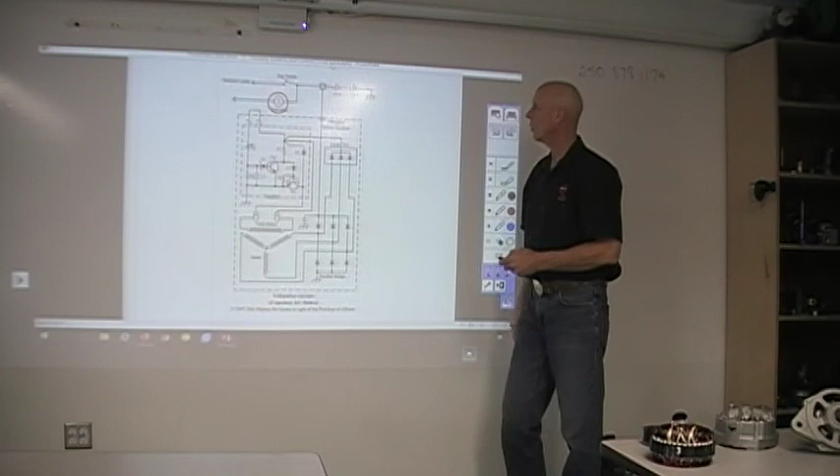Now, one of the other things I forgot to mention is on an amp meter, when we're installing an amp meter, on the back of the amp meter you'll see some things that say negative and positive. So if we hook it up backwards, it will read backwards. So make sure you hook the wires up in the right direction.

Okay, that's it for alternators, and now we're going to go into alternator testing.